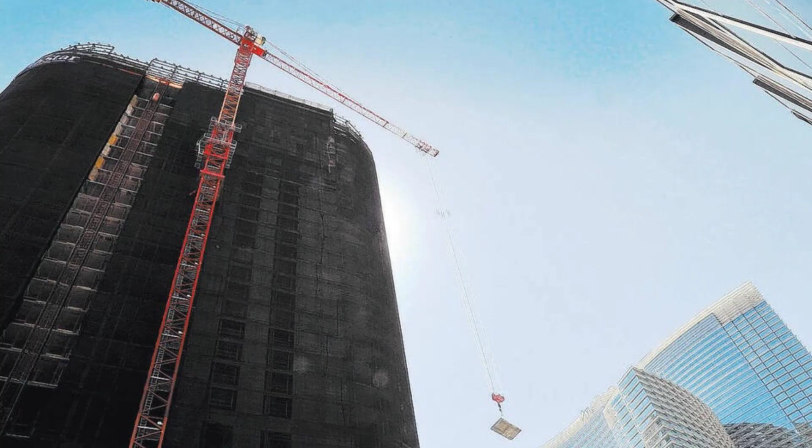Somewhere in the middle of that hallucination, for nearly 7 years, there stood a tower that proved the machine had limits. 28 stories of curved blue glass rising against the Nevada sky, its facade scattering the Strip's light back in cold, elegant waves. From the sidewalk, it looked like the most sophisticated building on the boulevard. Tourists photographed themselves in front of it. They had no idea they were standing before the most expensive mistake in the history of American hospitality.

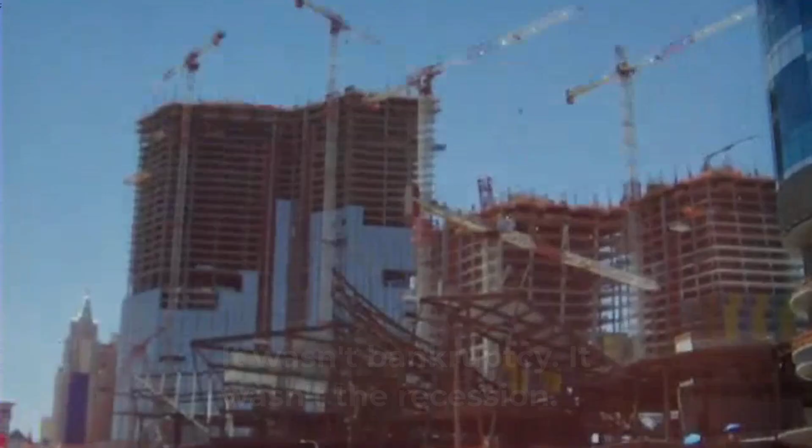The Harmon Hotel never checked in a single guest. Not one. Its rooms were never furnished. Its bar never poured a drink. The reason it stood empty was not bankruptcy, not the recession. The reason was hidden inside its walls, encoded into its bones, invisible to the naked eye, and catastrophic to every engineer who found it.

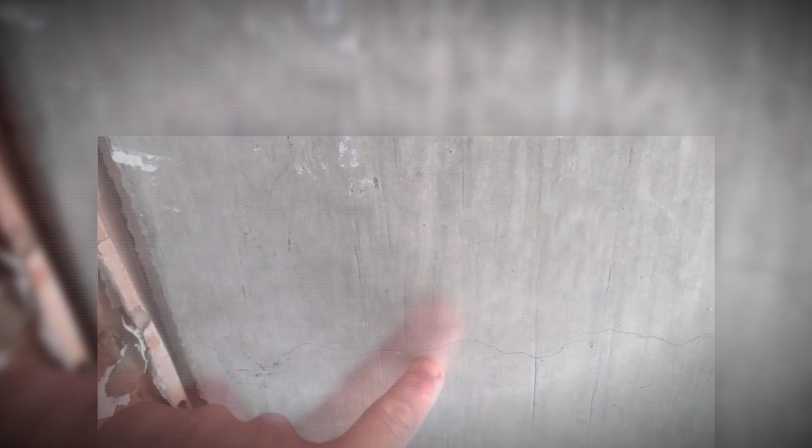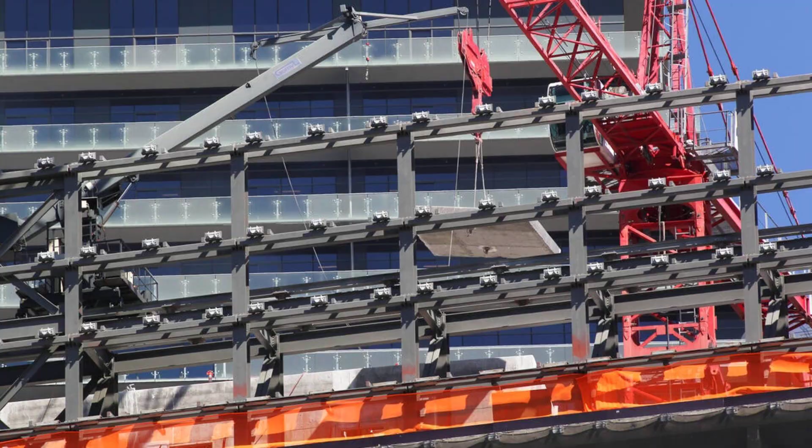This is the story of a building that was never allowed to become what it was designed to be, because the people building it made a mistake so permanent, so buried in cured concrete, that the only honest response was to erase it. And erasing it would cost almost as much as building it.

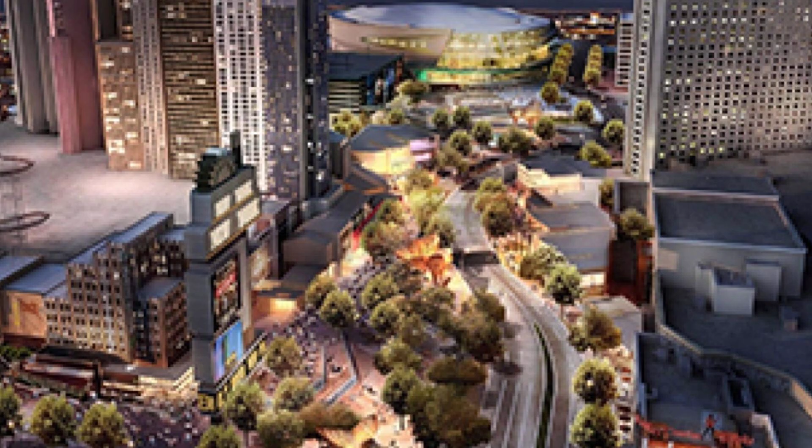Ambition on the Las Vegas Strip is measured in billions and built in glass, steel, and concrete. In November 2004, MGM Mirage announced CityCenter, an $8.5 billion city within a city. 28 acres of desert transformed into a modernist wonderland. The Harmon Hotel was to be its crown jewel. MGM wanted more than a hotel, they wanted a statement, one that would rise above the neon chaos and declare a new era for the Strip.

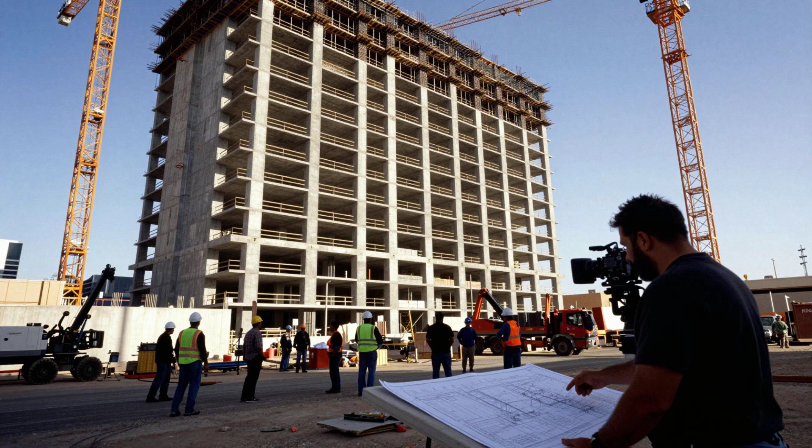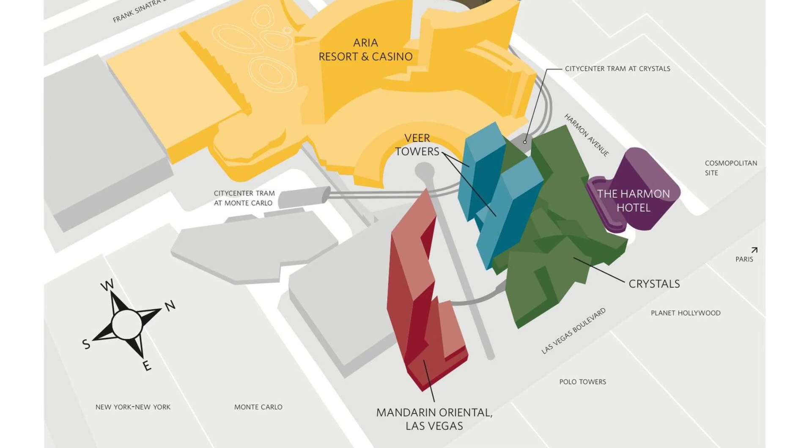The numbers alone staggered the imagination. $275 million set aside for a single tower, with a workforce that would eventually swell to over 10,000 men and women laboring around the clock. The vision belonged to Norman Foster, a name that echoed from London to Berlin to Hong Kong. Foster's blueprints called for 49 stories of curved glass, a shimmering oval that would catch the desert sun by day and reflect the city's artificial stars by night.

The Harmon would offer 400 hotel rooms, 225 luxury residences, and a rooftop bar nearly 600 feet in the air. Every detail was calibrated for spectacle, from the spa's cantilevered pools to the lobby's sculpted light. Contracts were signed in January 2005, awarding Foster's firm full control over architecture, engineering, and interiors. The project's scope demanded precision and speed. A compressed schedule meant that excavation, foundation work, and vertical construction began just months after the ink dried.

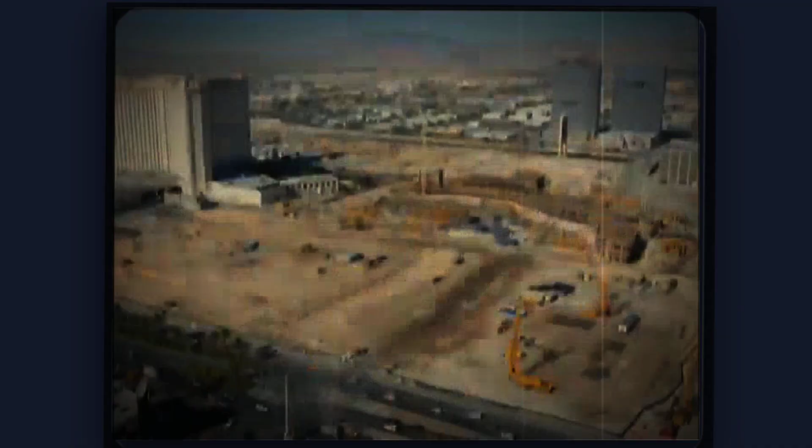In March 2006, Perini Building Company won the general contract, and by June, the first piles were driven into the desert floor. Concrete began to rise, floor after floor, as the Strip watched a new shape take form on its skyline.

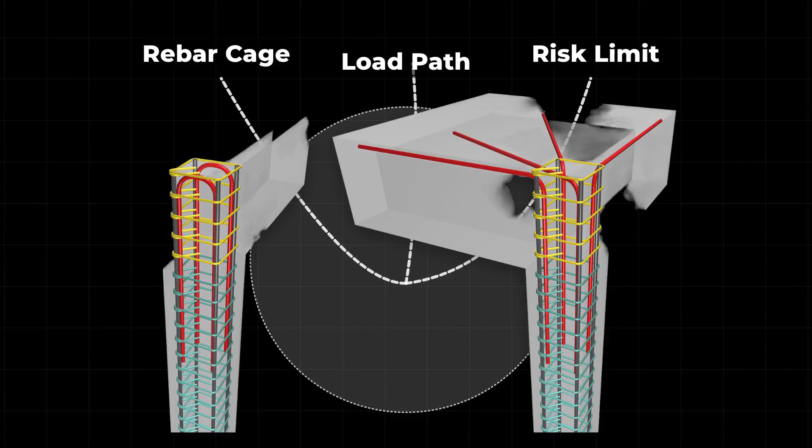CityCenter's promise was not just luxury, but a redefinition of Las Vegas itself, a place where spectacle and substance would finally align. In that promise, risk lurked, measured not in headlines or high roller bets, but in the silent math of engineering, the invisible logic that holds a tower upright. No one on those first days imagined that a margin of error measured in fractions of an inch could one day turn this monument to ambition into an empty shell.

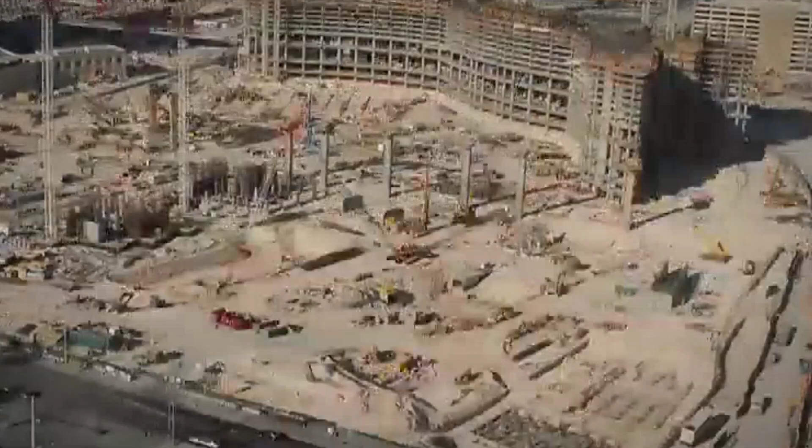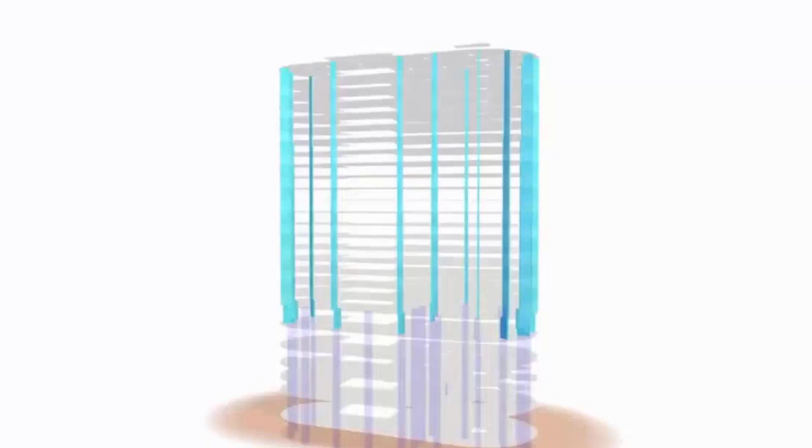Concrete rose in the desert, floor by floor, as if nothing could interrupt the rhythm of ambition. By the summer of 2008, the Harmon shell had reached its 28th story, its glass skin gleaming in the Nevada sun, a promise nearly fulfilled. But inside the core, a different story was curing, one that would never be visible from the Strip. In June, a team of independent forensic engineers pored over construction logs and blueprints, searching for the invisible. What they found would halt the project in its tracks.

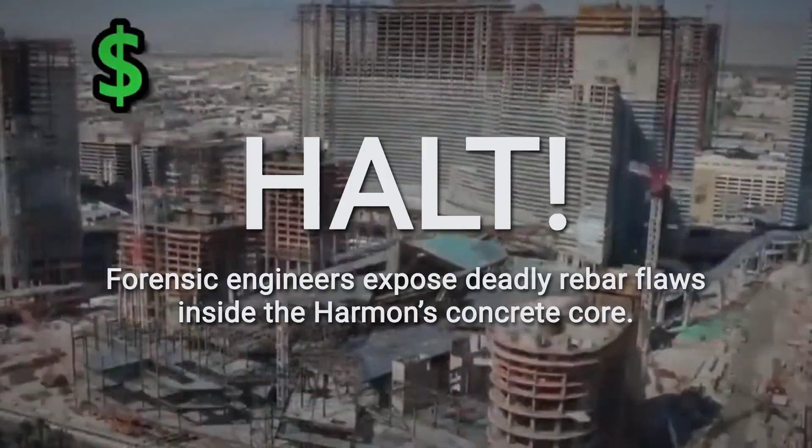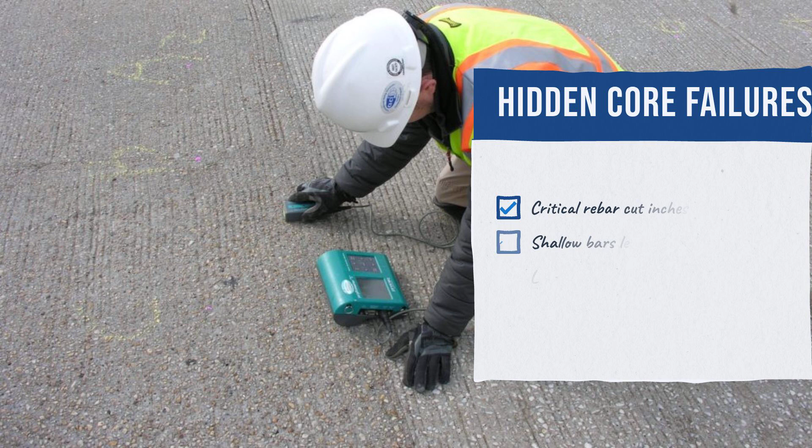On 15 of the completed 28 floors, the steel rebar, the hidden skeleton meant to anchor the Harmon against the violence of an earthquake, had been misplaced. Some bars were cut short, others set too shallow, many clustered out of alignment by as little as an inch. In the world of seismic engineering, that margin is the difference between a building that sways and one that shatters.

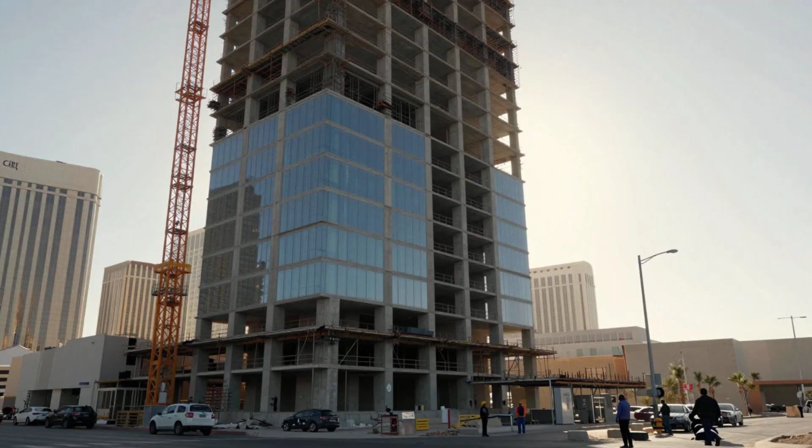The Harmon was classified as a Category D structure, designed to withstand lateral forces that could buckle lesser towers. Instead, calculations now showed a reduction in shear capacity by nearly 30%. The building's ability to absorb and dissipate seismic energy had been fatally compromised.

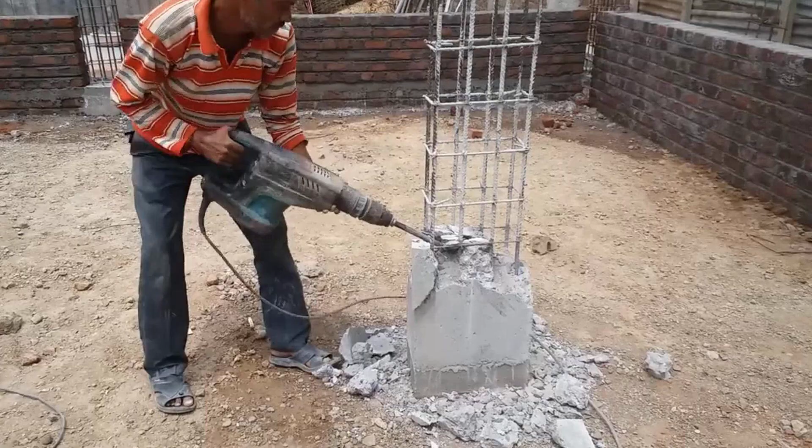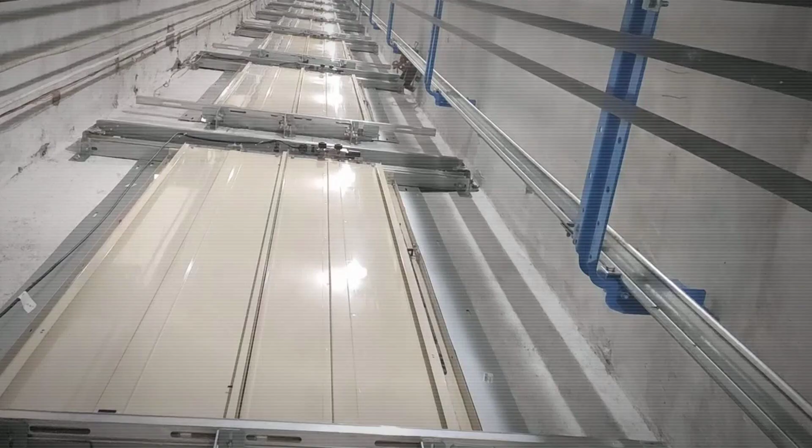The danger was not hypothetical. It was structural, permanent, and irreversible. Inspectors traced the error to the 5th floor, but by the time the forensic review was complete, the flaw stretched upward through the heart of the tower. The concrete had already cured. There was no way to excavate the steel, no practical path to reinforce what was now entombed within.

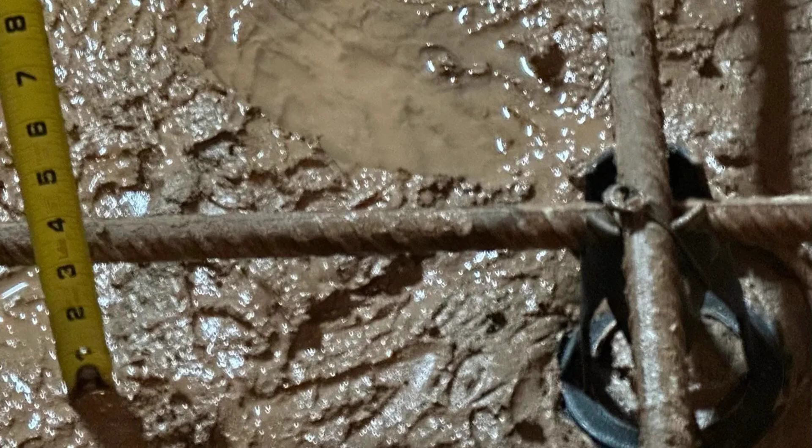The tower's elegant silhouette masked a silent hazard, a failure measured in fractions of an inch, multiplied across 15 floors. For the engineers, the numbers told a simple truth. The Harmon could not guarantee life safety in a region where the ground itself might one day turn violent. The Strip's newest monument was, in fact, a risk to everyone who might one day cross its threshold.

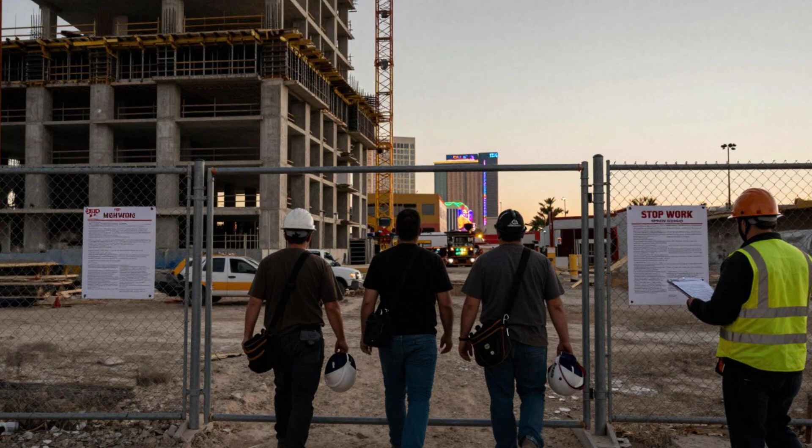Clark County's stop work order arrived with the force of a silent alarm. Overnight, the Harmon became a monument to uncertainty, a gleaming, glass-wrapped shell stranded above the Strip's endless motion. Permit SWO 2008-45, stamped in red, froze every tool and every hand. Workers packed up and left. The tower's lights never turned on.

Behind the facade, empty corridors stretched floor after floor, the promise of luxury suites and penthouses replaced by silence and dust. On the street below, the city pulsed with life. Tourists drifted past, snapping photos of a building that looked ready to open, never guessing it hid a flaw no lobby renovation could fix.

Buyers who had wired deposits for condominiums, some as much as $700,000, received terse notices. Occupancy was indefinitely postponed, their dreams and savings suspended in legal limbo. For some, the forfeited deposits represented years of work that now vanished into the paperwork of a halted project.

Regulators stepped into the breach. Clark County officials posted public notices and locked down the site, citing imminent safety risks. Permit amendments filed in June 2008 reduced the tower's height on paper, but could not erase what had already been built. The Harmon's glass reflected a city that never stopped moving, while inside, progress had been reduced to a legal question. What happens to a building that cannot be trusted to stand?

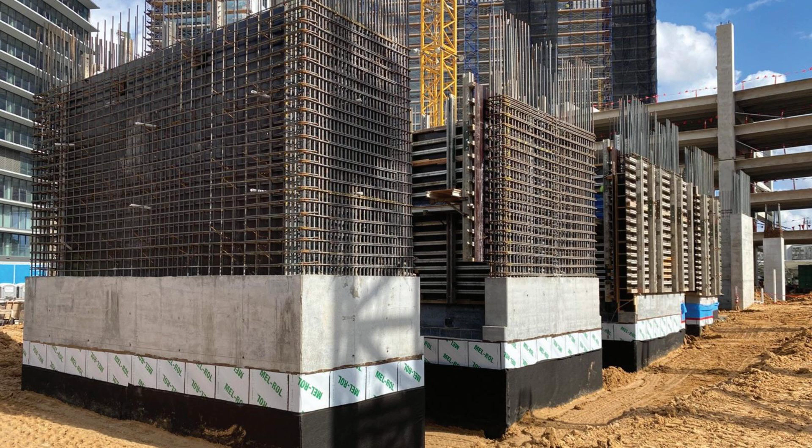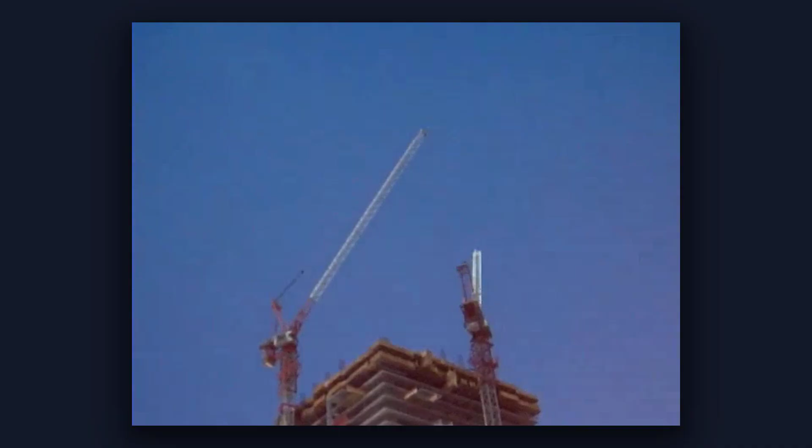The Harmon's fate, once a matter of blueprints and ambition, migrated to the courthouse. Construction halted, and the Strip's would-be icon became a pawn in a high-stakes legal contest. MGM Mirage leveled a claim against Perini Building Company, seeking more than $500 million in damages, an accusation that the contractor's errors had not only sabotaged the tower, but had also inflicted lasting wounds on CityCenter's balance sheet. Perini countered with its own arsenal, a mechanic's lien for $120 million, insisting that unpaid work and change orders had left them holding the bag for a project gone awry.

Court dockets swelled with filings, many stamped confidential, their contents redacted or sealed by judicial order. The true cost of the Harmon's failure became a matter of speculation, as both sides pressed their cases behind closed doors. Depositions ran hundreds of pages, and expert witnesses debated seismic codes and engineering tolerances, each calculation another volley in a paper war.

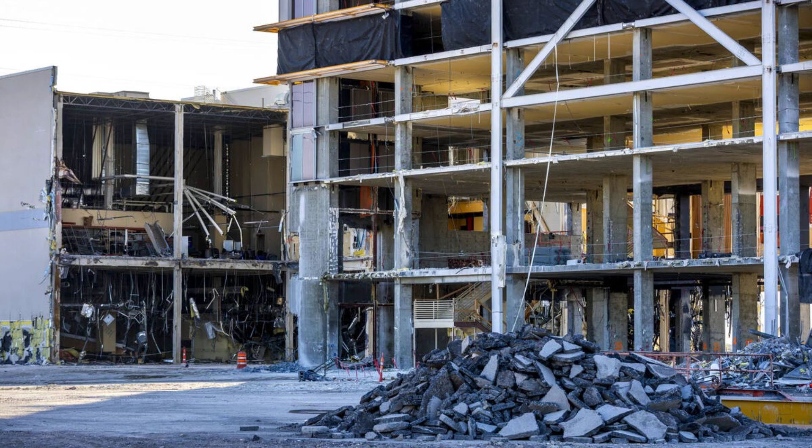The final settlement, reached in secrecy, left the public with only fragments, a confidential agreement, a vanished sum, a monument to ambition reduced to legal ash. The unfinished tower remained, its glass reflecting the Strip's lights, while inside the records, the question of blame was never fully illuminated.

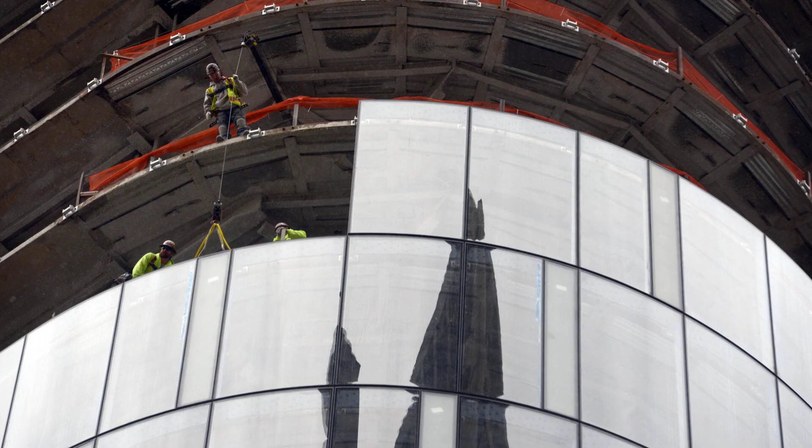Demolition at the Harmon unfolded with quiet precision. Hemmed in by Veer Towers to the north, Vdara's glass to the south, and the Crystals complex below, there was no room for spectacle. Implosion was out of the question. Las Vegas code and common sense saw to that. In June 2014, AECOM's crews took charge, beginning with a silent shutdown. Power was cut, elevators were sealed, and systems were drained.

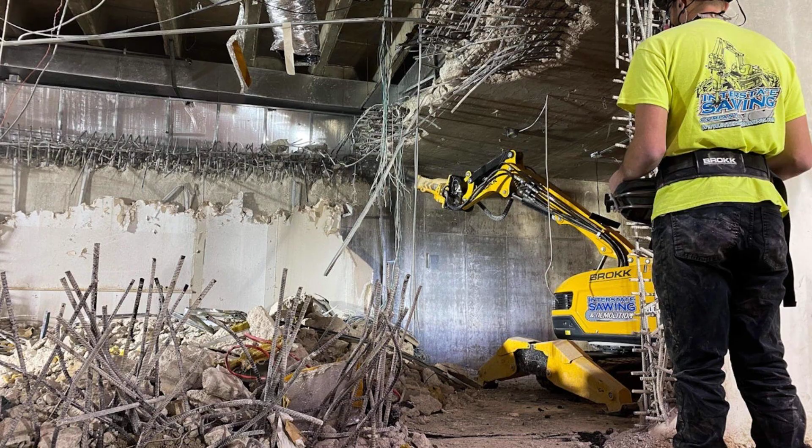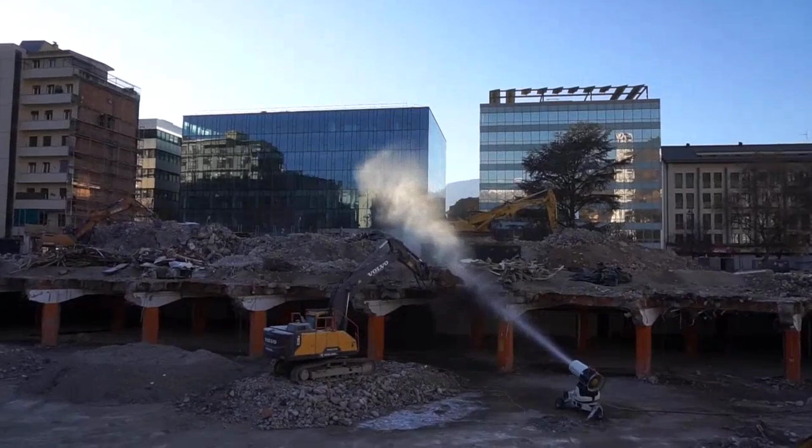Inside, workers stripped each floor, removing wiring and pipes that had never been used. Concrete saws bit through unfinished suites, while blue glass panes were carefully lifted and stacked, remnants of an unrealized vision. By autumn, cranes hovered as slabs were sliced and lowered, a process repeated 28 times, each move logged in contractor records. Dust suppression rigs ran constantly, shielding the city from the work. The cost reached $45 million. On May 5th, 2015, the final slab was hauled away.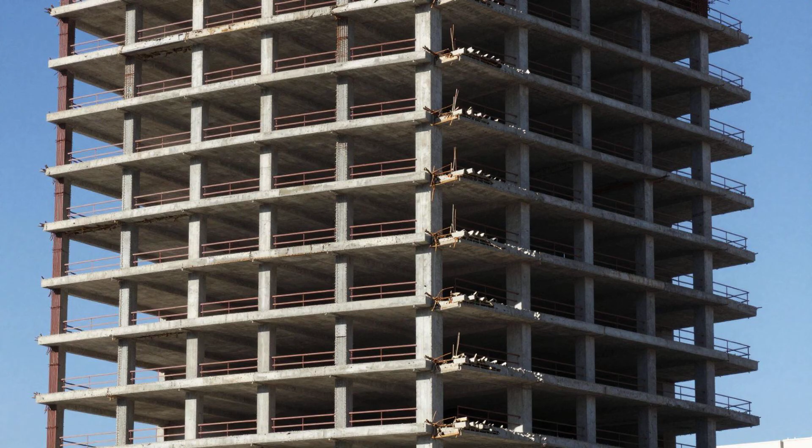In the end, nothing remained, just open sky where the Harmon once stood, a methodical erasure of a once grand idea. In a city built to defy reality, the Harmon's silent core proved physics never bluffs. Its vanished presence leaves a warning, even here. Illusion can't outlast a flaw measured in millimeters. Today, every tower rises on the certainty that concrete remembers what ambition prefers to forget. What do you think endures?